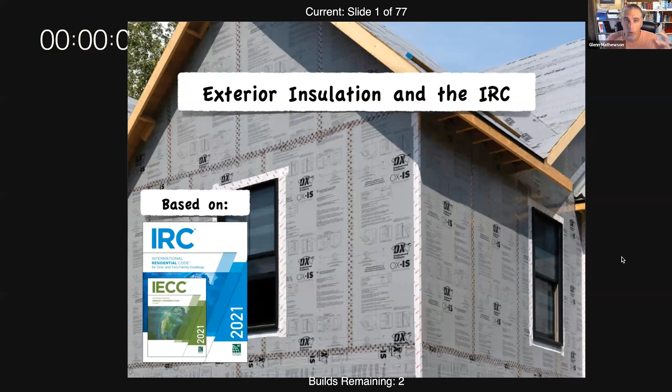So this is a brand new presentation I put together just for this event, Exterior Insulation and the IRC. This webinar is based on the 2021 International Residential Code, which includes the provisions from the 2021 International Energy Conservation Code. I'll give some details on that in a little bit.

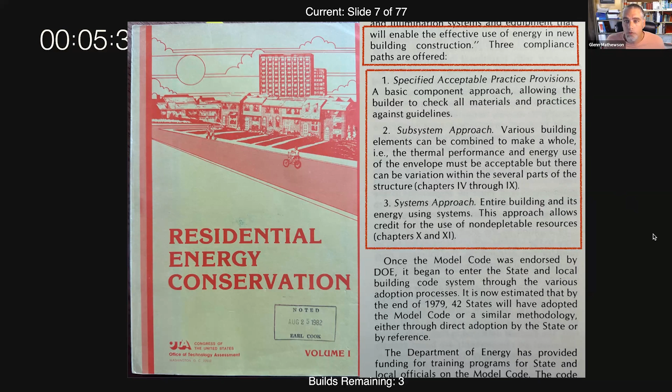And so we get these 3 methods of compliance. You've got the specified acceptable practice provision, and that's simply about energy loss, about R value, minimum R values of individual insulation components. R value is restricting the movement of energy through it, and that's what it was completely focused on: put enough restriction of energy loss in these individual insulation components.

And then the next one was the subsystem approach. What this allowed you to do was trade off some of these energy restrictors, R value. Maybe you use a little less insulation in the walls, but a little more in the ceiling. So it was a way to look at it not as individual components, but the entire building thermal envelope and do trade-offs between. But both of those systems were simply focused on not letting energy get out of the building, or in hot climates, get into the building, all focused on energy movement.

The third system expanded further and said, hey, what about energy creation? Because this was all about depletable resources. If we had a world of magical, abundant, free energy, by rubbing your hands together you could go 1,000 miles on your car, we probably wouldn't be having any of this discussion. We wouldn't have to conserve energy. So the third approach said, if we can encourage folks to create less energy in the house, then we don't have to worry about restricting the loss of so much energy, because we're creating the energy in a more efficient way.

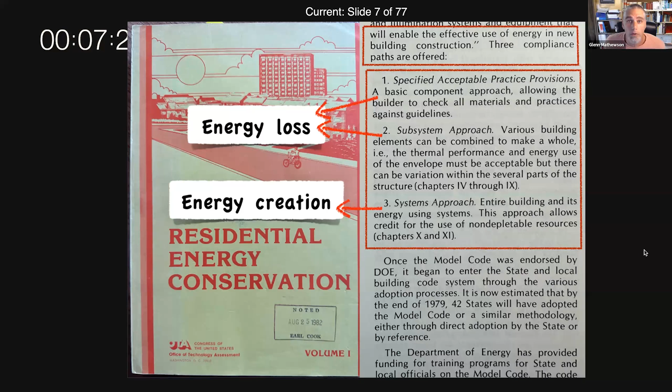So that extended to systems like mechanical systems, a higher efficiency furnace, higher efficiency appliances, better heating and insulating of your water pipes, all kinds of other methods to get to this overall concept of conserving energy.

Finally, the federal government, with funding and interest in this, was able to promote and fund the creation of the model energy code. This was our first real energy code, collectively lobbied to then be put out to governments to adopt.

We can see we have those same 3 concepts just under different titles. This one is about the minimum R value of your individual components. This is about the overall U value, as it was called then, of the entire building thermal envelope, which allows you to do trade-offs. And the third is the systems analysis, about cost of energy. That's kind of what it came down to - how are we going to compare this, how are we going to determine energy creation versus energy loss? We're going to have you compare to a standard house that's just using the R value or U value approach, just the insulation approach, for not losing energy.

That cost of energy method said: take the yearly costs of that baseline standard-built house, and now tweak it - put in a higher efficiency furnace, different appliances, better windows, change it all around. And as long as you don't spend more money than that baseline house, then you comply with code.

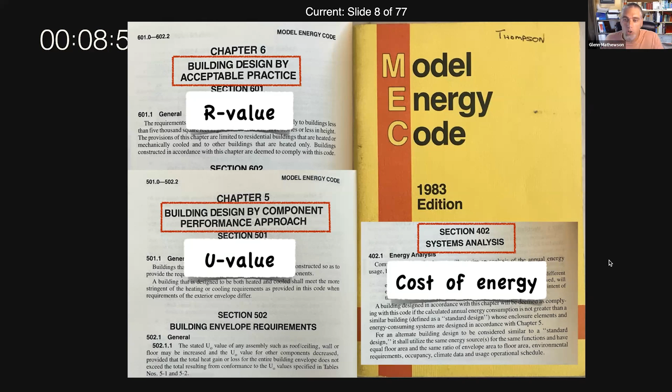So we started in the 70s, guys, with 3 different choices. Now today, in 2021, the code lays out 5 options here. Really it's 4 options and then a 5th one we'll talk about briefly - well, very briefly. The first option in the 2021 code is called the prescriptive compliance option.

This one is basically the option of the past. It simply gives you either the maximum or minimum U factor for the entire thermal envelope assembly. So whether you're 24-inch on center, 12-inch on center, or 16-inch on center, it doesn't matter - it's all calculated into the overall U factor of that assembly. I'll talk a little more about what U factor is in just a minute.

The other option you have is simply to look at individual component R values, like the R20 in your walls, R60 in your ceilings, et cetera. So within the prescriptive path, I've shown you 2 ways to calculate your energy compliance under that one option. And then you have a third way to do your energy compliance, again under that first prescriptive option.

Now what that's called in the code is total UA, but it's the same as what was developed basically in the 1970s. This is something you guys may be more familiar with - the term REScheck. REScheck is probably something you've all heard of. This is software by energy.gov, the Office of Energy Efficiency and Renewable Energy, basically the federal Department of Energy. They put together this software that's free to download, and it allows you to put in the areas of your different thermal envelopes. That's where you can do your trade-offs - a little more insulation here, a little less there, so that overall the thermal envelope complies.

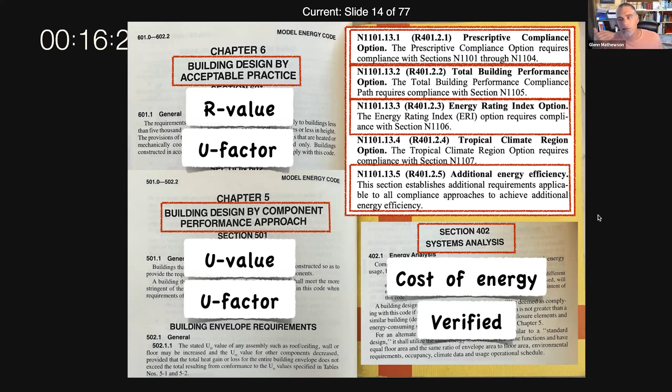FYI, that is something in your governments that maybe are not all on board with the enhancements in energy - that may be something you see amended out, because the way it's added in like that, it makes it convenient for folks if they wanted to go, no, we're not going to accept that as our government code.

So let's get into a little talk now about the prescriptive thermal envelope. Hold on, I've got to do a clock check real quick, make sure my time is right. Okay, so let's talk about the prescriptive thermal envelope. And as I alluded to already, I called it a recipe - I maybe should have brought this slide in sooner. This is one of my favorite slides, though, when I'm talking about the IRC.

Most of the IRC is just a cookbook full of recipes you can choose from. If you follow the recipe, you won't give your family food poisoning. If you follow the recipe for the structure of your home, it shouldn't collapse on your family. If you follow the recipe for energy compliance, you'll have sufficient energy, comfort, and energy use in your building. It simply says, do it like this and you're compliant.

It's a very easy way to make dinner for your family, right? Just look up the recipe. But not necessarily the most flexible way either, is it? You follow the recipe, but if you don't, hey, there's no promise that this is going to taste as good as we promised it was going to taste.

So if we look at that first recipe, the way the 2021 code made one subtle shift is it starts out by talking about the assembly, like a wall assembly, a ceiling assembly, a floor assembly, basement wall. You can see all the different columns, all the different titles for these columns, and what this gives is a U factor for that assembly. It incorporates everything: the air space within the wall, the air film on the actual face of the wall which provides a small amount of R value, the gypsum board likely on the inside, a little bit of R value, the sheathing - it allows someone to take every piece of their assembly and determine an overall U factor and then comply with that.

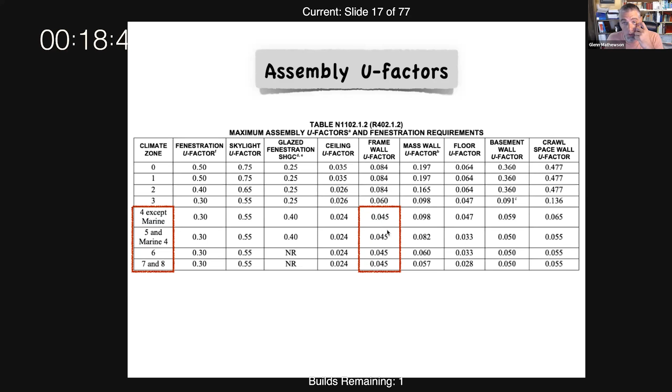So let's look at this example for these climate zones on the top here, or on the left - 4, 5, 6, 7, and 8 climate zones. And we can see that the maximum U factor here is 0.045. Now, U factor is a reciprocal of R value, so you can easily calculate between R value and U factor simply by the reciprocal, dividing by 1 or in this case dividing by the U factor. So 1 divided by 0.045 is equivalent to about an R22.

Now remember, that's not saying R22 cavity insulation. That's saying R22 of the entire assembly, so that's complete choice from the builder. If you're using insulated vinyl siding, if you're using a 5/8 Type X gypsum on the walls versus a 1/2-inch gypsum, it's going to change your overall U factor. And you as the designer can say, here is my exact wall assembly of all the pieces together, and I meet this maximum U factor.

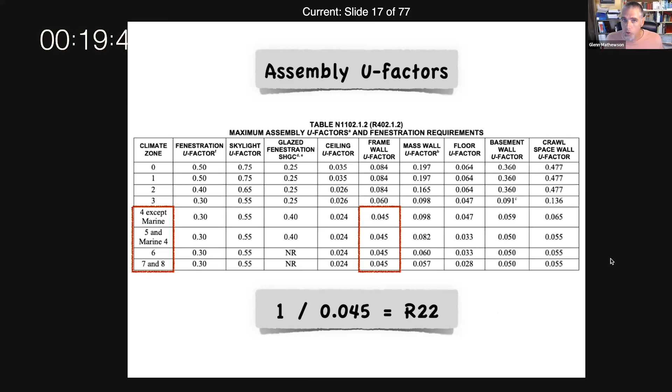There's a choice, but maybe that's too much work. You know, gosh, I don't know how to calculate that and figure out all these individual U factors. So next, the IRC says, fine, here's another recipe - a recipe for just insulation R values. We'll make it really easy for you.

You can see all the columns are essentially the same. Of course, this wood frame column now refers specifically to wood frame, whereas the previous one for U factor could be steel framing, wood framing, any kind - because you're going to calculate every single part, all the thermal bridges and their equivalents, to get your U factor. Here, it's dumbing it down to say, okay, this is for wood framed walls, and here's simply the insulation R values. This is another place there was a big increase from the 2018 to the 2021 code.

So if I again show you just those 4 climate zones, or climate zones 4 and up to 7 and 8, let's compare that to what I just showed you with U factor. You've got 4 different choices here. First, you could do cavity only insulation - and yes, I know that's R30. A lot of folks are probably going, did you say cavity insulation? I mean, there were times in the past that was our ceiling insulation level. And in some climate zones, like climate zone 0, it's still R30.

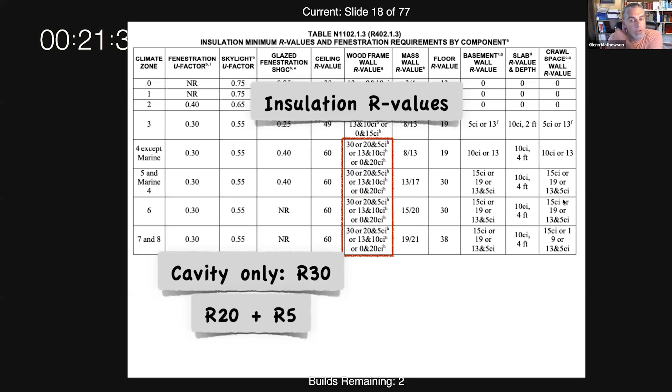And that's what the CI stands for when you look at this table, continuous insulation. Another option right here in this recipe, you could use R13 cavity with an R10 continuous. So what do we have here, my friends?

2x8 wall, or a double wall framing, or a 2x6 wall, or a 2x4 wall. So the energy code recipe and choices are designed around the different types of wood frame wall construction. So it correlates, it works, and it gives choice. How do you want to frame your wall? Pick that, and then this recipe will give you an option for that.

And then the final option here, and this is again kind of new coming into your 2021, is continuous only of R20. That ignores any size - build your wood frame wall however you want. We're not even going to worry about the cavity and what can fit inside of it. Just go full R20 on the outside.

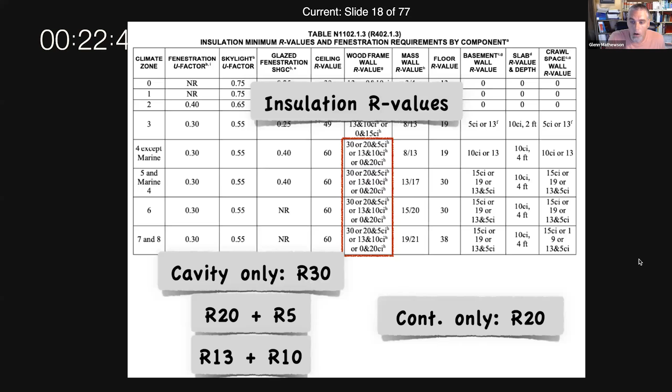And notice the correlation here, right? Continuous only R20. But as I already said, we're getting R values in the sheathing and the air film and the interior wall finish - we're getting tiny little pieces of R value. So this R20 is comparable to the R22 that we saw when you did that U value option, or the U factor option, where you're going to look at the entire assembly. So we can see the correlation between all these different choices.

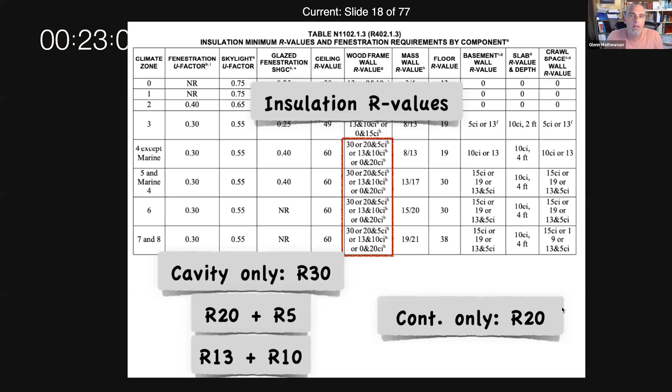Now, the shocking thing to a lot of folks, again, when we're coming into the 2021, that's going to kind of shake the industry up a little bit, is continuous exterior insulation, because that's not been common construction. I started framing back in the late 90s, and I've never framed a house myself with continuous insulation. It's definitely a different kind of construction practice, driven a lot by new materials and new technologies and new building science that we better understand.

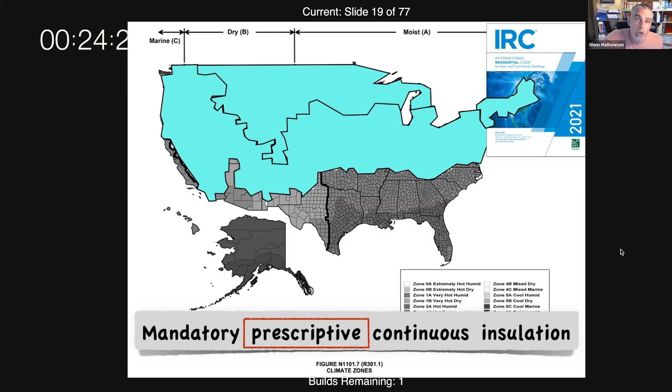Now, mandatory, but mandatory after you've chosen the prescriptive path. Because remember, the prescriptive path is just a cookbook - do these things and you're good. And so that's telling us, yes, once you've chosen that path for compliance, now you're looking at continuous insulation.

Of course, there is always the option for R30 cavity, but what does that also do? It completely changes your construction method, right? From 2x6 and 2x4 walls to now either doing 2x8 studs, or what may be more likely the choice would be like a double stud construction. So either one of these, R30 cavity or continuous insulation, is definitely going to be a big learning curve and a big shift for the industry.

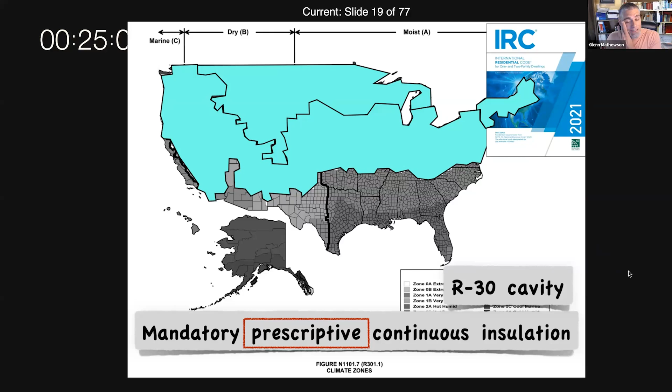And all I can say is this: we can see that this is certainly the direction that the codes are moving. But still, let me not say that this is so mandatory yet, because remember, part of the prescriptive choice is to use the total UA option, where you look at all the assemblies of the building. This is your REScheck option.

And so, like I was showing you before, kind of explained, but now I can show it to you. Here is your prescriptive R values. Just put all of these R values in all of these assemblies if you have them. But with REScheck, it allows you to say, you know, I don't want to do all that wall insulation. Let's decrease the wall insulation.

I'm not moving you down the column in the table, I'm showing a decrease in insulation in walls. But how are you going to offset that? By an increase of insulation, say, in your ceiling, or an increase of insulation in your floor R value. And the REScheck software calculates all this for you.

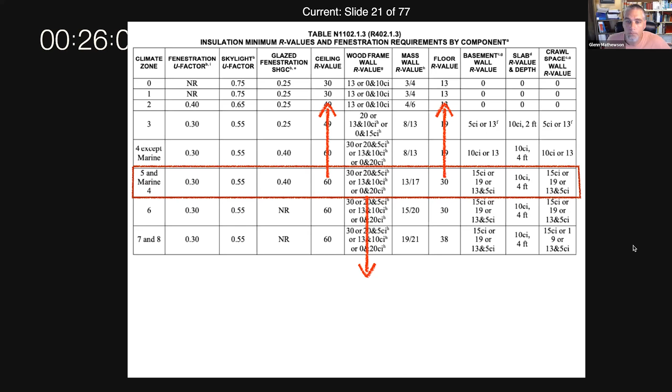So this is continuous insulation, right? This is the movement we're seeing towards continuous insulation. And as I said, this is a little bit new. This changes how you do your window pan flashing and flashing.

Do you set your windows back? Do you set them forward? How do you adjust your soffits and your overhang to get that standard size soffit? This is definitely not just something like putting in a better window. This certainly alters our normal construction practices a little bit.

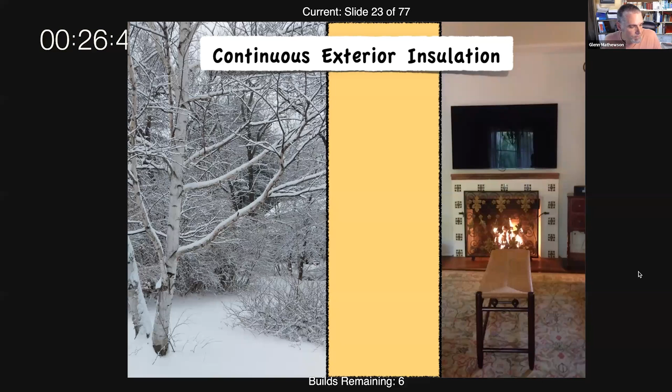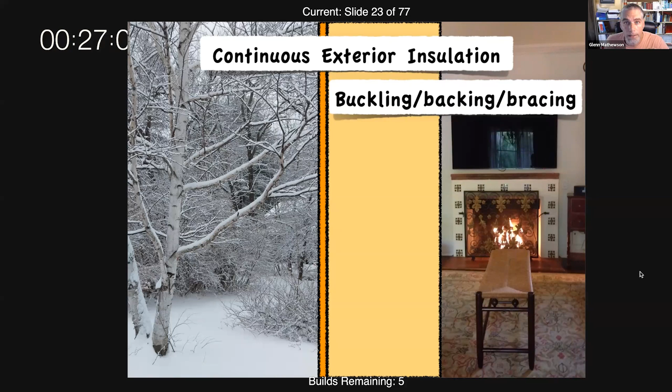So we need something to stop the studs from buckling, and something for backing and bracing. I'm going to talk about that in just a minute. We need a water-resistive barrier, and that generally needs to be on the outside. For buckling, backing, and bracing, there's some variation.

The water-resistive barrier needs to be on the outside to protect everything we don't want to get wet. We need an air barrier, part of the energy codes, right? An air barrier simply stops the movement from outside to inside, or inside to outside. That's it. So the air barrier could be on the outside, but you could also use one on the inside—perhaps your drywall could be your air barrier. It could go either place.

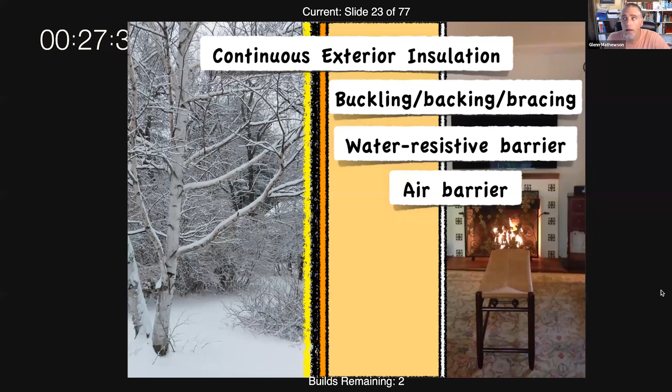And then, of course, your vapor control. Vapor retarders are kind of the historical way we've managed vapor. In the past, we've had warm-in-winter-side placement, so in warm climates, you would put the vapor retarder on the outside. The 2021 code has really developed in vapor control, and it's always going to be on the inside now, wherever you put your vapor retarder, if you do.

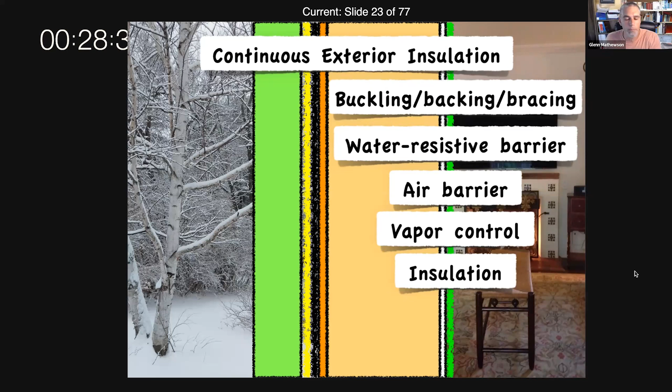But that's using a vapor retarder. My title here says vapor control, because that's the point—we're trying to control water vapor. We don't want condensation. So there are other ways to do vapor control now. With insulation, you can do continuous exterior insulation as a form of vapor control. Now we're full circle back to the original feature we're talking about: continuous exterior insulation for the sake of thermal protection, keeping the heat from moving out for our own comfort and energy savings. But we see at the bottom, it's also now a method for vapor control.

So wall sheathing—the first thing is buckling, right? If we have these studs loaded from the top and resisting on the foundation at the bottom, why don't we build decks out with 2x4 posts? Because the 2x4s will buckle. They don't have enough cross-sectional area. So the first thing wall sheathing can do is keep your studs from buckling.

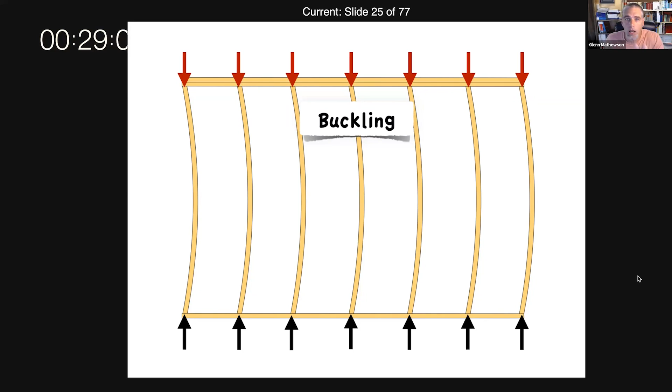But you don't have to use wall sheathing. The IRC actually has a way for you to do blocking if you want to keep the studs from buckling, but wall sheathing's the common choice. What's the next thing? Backing, right? Wall sheathing is there for backing for your different types of exterior coverings. So you may not need it on all of them.

What if you're doing an anchored brick veneer, a big thick brick? Well, it has its own strength from wind loads hitting it and pulling away from it, positive and negative wind loads. So backing's not an issue. But what if you choose a vinyl siding? It's a thinner material. Now you're going to need a type of sheathing to provide backing for those wind pressures, based on your choice of exterior covering.

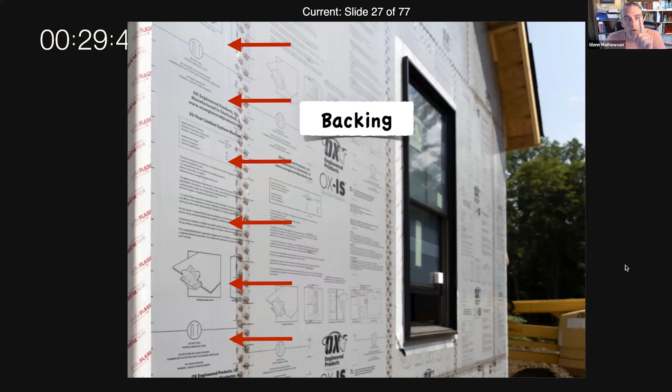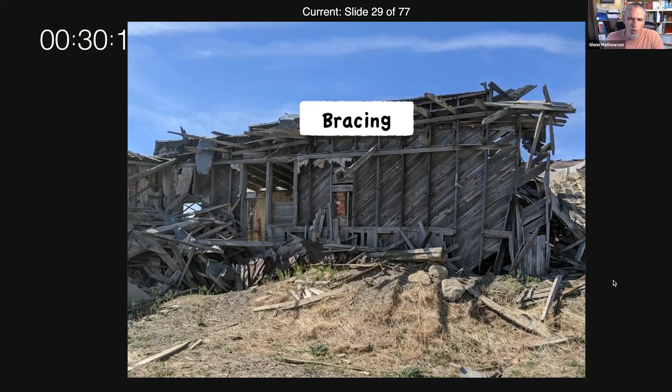And look at this—the house isn't even there anymore. But what stayed up? The braced wall stayed up. And why? Because it's diagonal boards, so we have a triangle, and the triangle creates that bracing. This is the old way of building. But then we started developing new products and new materials like black Celotex.

How many of you have seen that in your remodel work? I even worked with some of that in the late 90s—fiberboard sheathing, right? Once black Celotex came around, it was an easier, faster way to build. We could just plop up one big sheet, but we still had that let-in bracing to create that bracing for the wall, to create that triangle.

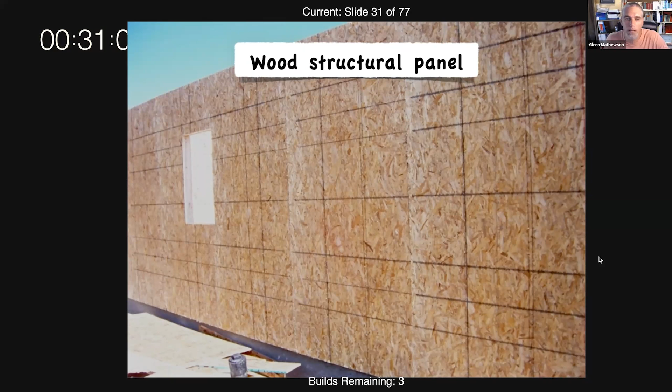And then, of course, what's everyone using today, right? Wood structural panels—that could be plywood or OSB. Last time I tried to turn one of those panels into a parallelogram, I didn't have a lot of luck misshaping it, because it does a really great job of bracing—it stays in the shape of its plane. Now, all these things I've mentioned are still in the recipe book. You can still do let-in bracing, you can do wood structural panels. There's all kinds of recipes in the code for braced walls, for buckling. I said you could use blocking.

Do you need backing for siding? Do you not need backing? That's all spelled out in your IRC cookbook. But aren't there other ways to cook a meal for your family?

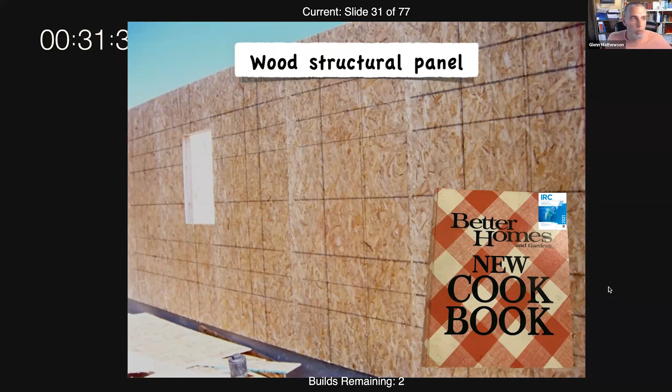We don't all cook from the same cookbook, and we're all still eating, aren't we? So the IRC gives us this section, one to never forget, R104.11, alternative materials. It starts out saying the provisions of this code are not intended to prevent you from doing other things. It's like the cookbook saying, hey, we've offered you some recipes here, but we're not saying you're gonna die if you don't follow our recipes. So what's another way you could make a meal for your family and know that they're going to be okay? They're not going to get food poisoning.

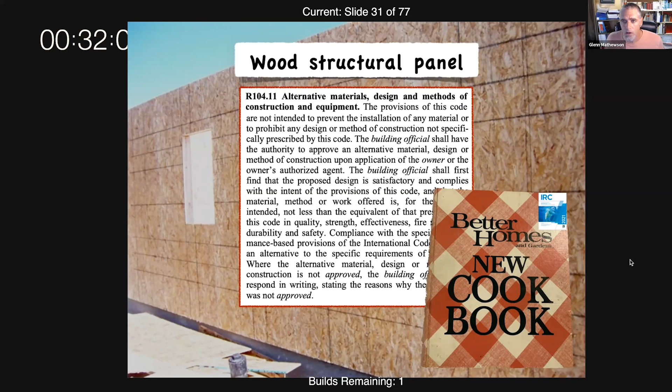Maybe from a chef, right? So what would be the analogy there? A design professional, like a cooking professional, educated and knowledgeable in coming up with unique and creative dishes. So you get an engineer, and an engineer could look to a document like special design provisions for wind and seismic. Notice it says design provisions. It's not speaking to you and I. It's not a recipe for prescriptive, hey man, just follow the rules. This is design provisions for the chef, for the engineer.

What's another way that we might get food that we can feel confident is somewhat safe for us? Like Twinkies. Okay, I know maybe they're not the safest for us. I need maybe a better example. Maybe one of these new plant-based meats or something. Well, maybe that's not necessarily from a chef, is it? Or an engineer. This is more like a tested product, like the FDA is going to come in and make sure your Beyond Meat or whatever is okay.

And so this is where we get another way of compliance, which would be a tested product, right? Like this, for example, Thermoply. I knew of Thermoply back in the 90s. It's been a product that's been around forever. It's not a wood structural panel. It's not a let-in bracing. It's not diagonal lumber sheathing. It's a proprietary product. So it gets tested, like your Twinkies if you will, to say, hey, is this going to give us the end performance we want?

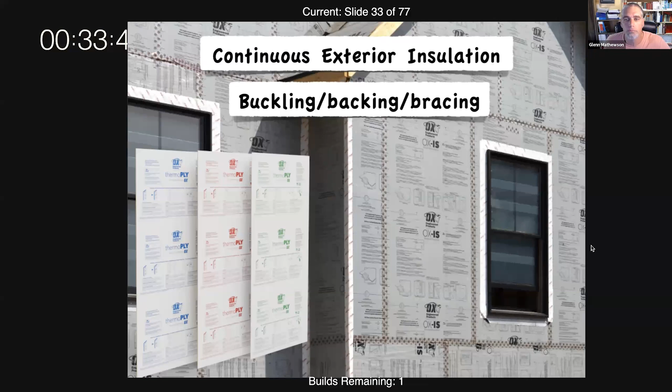And so that's where we're back to maybe we can get this to our continuous exterior insulation, since we're putting it on the outside, and it's this new kind of thing that we're not all familiar with in construction yet, and definitely the direction the industry is going. Maybe it can also provide for us some buckling, backing, and bracing provisions, and maybe it's not wood structural panels.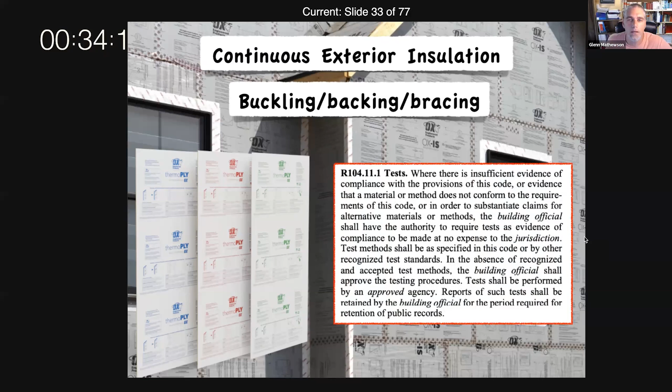How would you verify that? How would you verify your Twinkies? Right, it's going to have to be tested. You're going to have to prove with evidence that, hey, this will do the job. So that section for alternatives has a subsection about tests, simply saying, hey, tell us that this works. Give us the evidence that this is going to do the job of buckling, backing, and bracing.

Now, one thing I'll mention real quick that I threw in here is this is what's coming for you in the 2024 IRC. Remember, the IRC is just model codes. We can all be a part of contributing ideas to it. Somebody came forward and said, I want to add another recipe to the IRC. And this was approved for the 2024 IRC as an appendix chapter. I'm just briefly bringing it up to show you that these recipes aren't written in stone. We can all create new recipes to put in the code as options, or again, go with engineered designs or tested products.

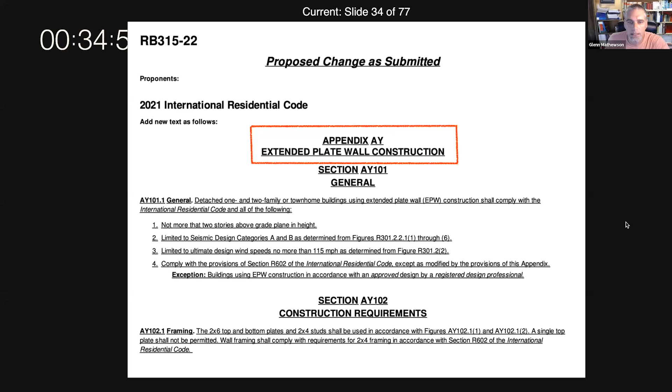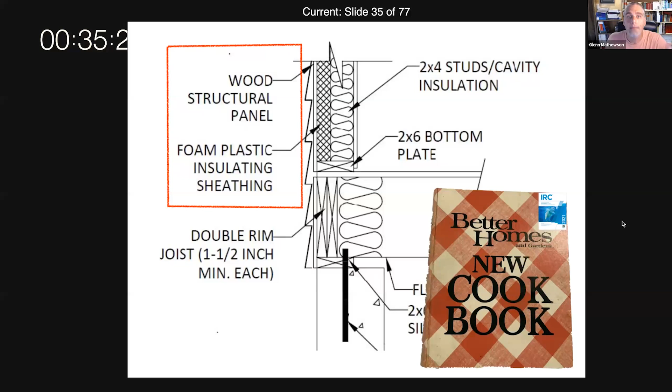This is extended plate wall construction. I added it in this portion of the presentation because what does it speak to? Your wood structural panel and your foam plastic insulating sheathing together, as one piece, looking at it as one design method. This allows you a recipe now to simply use these commodity products, if you will. So just another recipe coming for you in 2024. Maybe you have some recipes to propose for 2027. That's how these get created. People have to come up with them and propose them.

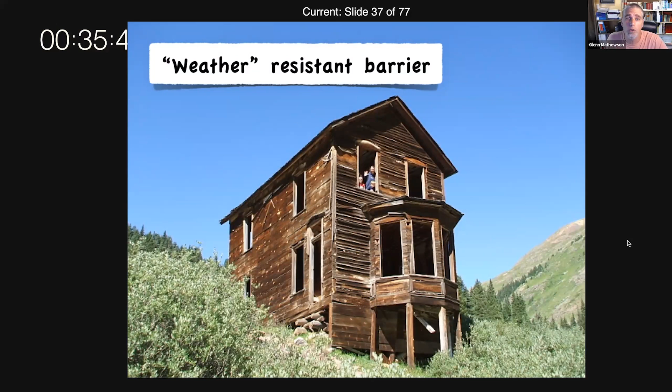All right, what else might be happening on these walls? The water-resistive barrier, right? I showed you that thing, and I took you through all the different things happening on our exterior wall. So water-resistive barriers used to be called weather-resistant barriers way back in the day. And actually, even in our recent history, it was still called a weather-resistant barrier. Let me take you back to one of my dork books here, my history books. This is from 1950, from the federal government, Forest Products Laboratory, Department of Agriculture. And look at this, condensation control in dwelling construction.

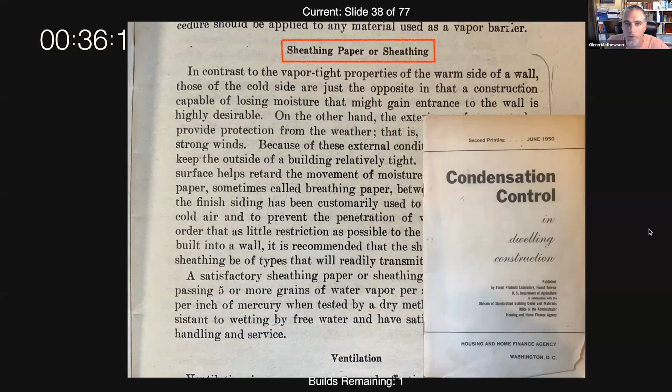In 1950, the federal government was trying to help research and provide guidance on how to do that. Here's a section from this book about sheathing paper. Notice what it says here. I love this: sheathing paper, sometimes called breathing paper, between the sheathing and the finished siding has been customarily used to reduce infiltration of cold air and to prevent the penetration of wind-driven rain. Weather barrier, right? Cold wind, cold rain. Weather, we associate wind and rain, precipitation, weather.

So it's a weather-resistive barrier, speaking specifically to sheathing paper, a product, not necessarily a performance. Now move forward in time to the 2000 IRC, and we still see the reference of sheathing paper, right? That doesn't sound like a lot of choice or options to me. That sounds like paper. Can you all imagine what paper looks like in your head? Yes. Well, the code's telling you paper. But notice what we're even seeing here: it wasn't even required.

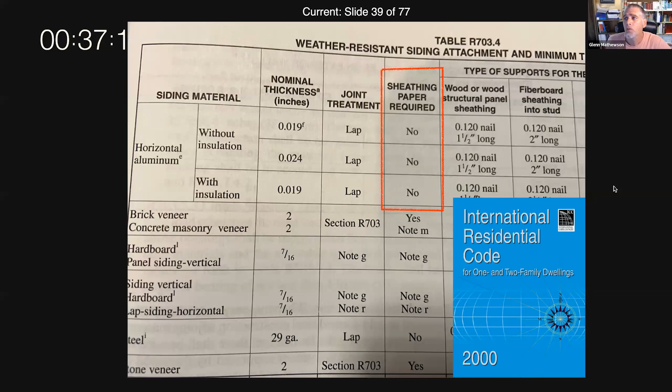In 2000, you could build, depending on your siding material, without even having any weather-resistant sheathing paper at all. Now move forward one code cycle to 2003, we still see the term weather-resistant sheathing paper, but now we're actually getting a statement telling us about where it needs to be installed. In 2003, it was everywhere, except for those exceptions. But if you look at what it is, it's still referring to felt, to paper. Look at the title, sheathing paper. Paper, that's something in your mind's eye, and the code says that's what it has to be.

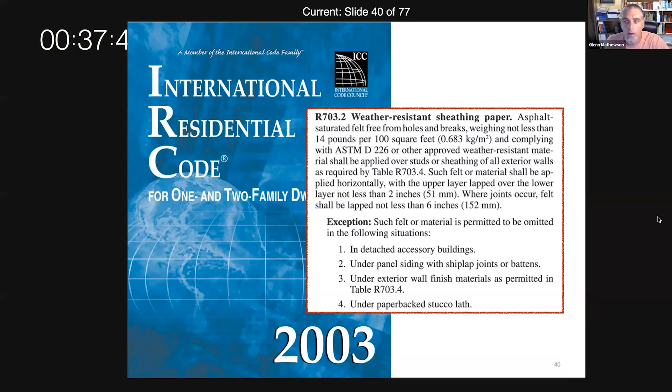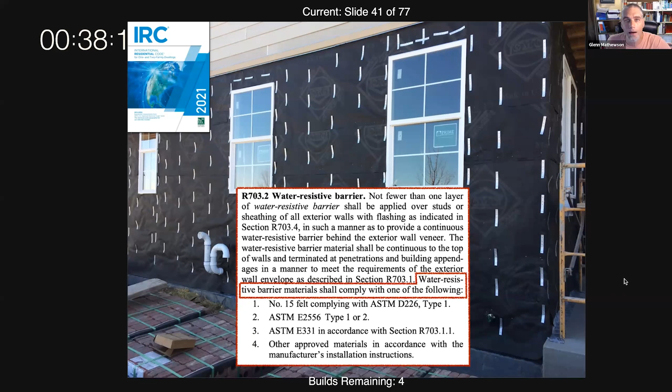So what's the first choice, right? Good old tar paper, sheathing paper, just like what's in the picture, the basic simple commodity that's been around since the 50s. What's the second choice? It references us to an ASTM standard. That ASTM standard is essentially your sheet products, your house wrap or home wraps, and those are all trademarked terms, but you know what I'm saying, right? Your big sheet products that aren't an asphalt paper, but still somewhat similar, but proprietary. They can be made out of all kinds of things. People can be creative. You test it to a standard, and that's what makes sure all these creative ideas still are going to meet the same performance.

Test standards promote freedom of innovation, and that's an odd thing to say - test standards promote freedom of innovation. Most people think test standards restrict freedoms, but you got to shift your perspective.

What's the third choice? The third choice is referencing an ASTM test for essentially testing windows, curtain walls, doors. So in case you came up with a water resistive barrier that you wanted to test it in the way that windows are tested - I'm not super familiar with that one, but guess what, it's another option. And then what's the fourth option? The fourth option is, hey, that's a pretty cool new idea. That's the way I word it. But what does it say? Other approved materials, other approved materials. That's the code saying, hey, that's a new idea, right?

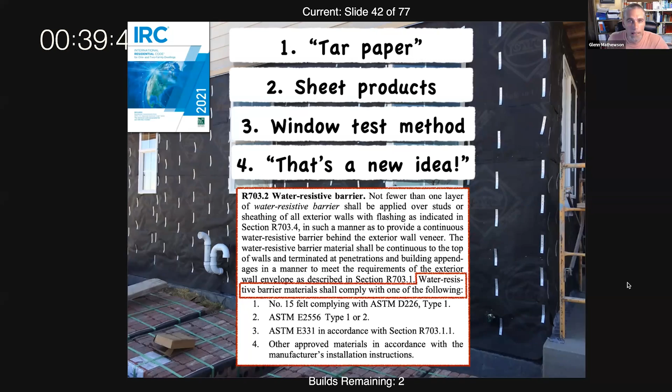So what about the tape systems? There's manufacturers out there with wood structural panel systems that you can tape, and your water resistant barrier is built into it. This is an image from the sponsor of this today, and they have a product where the water resistant barrier is built into it. Hey, that's a new idea.

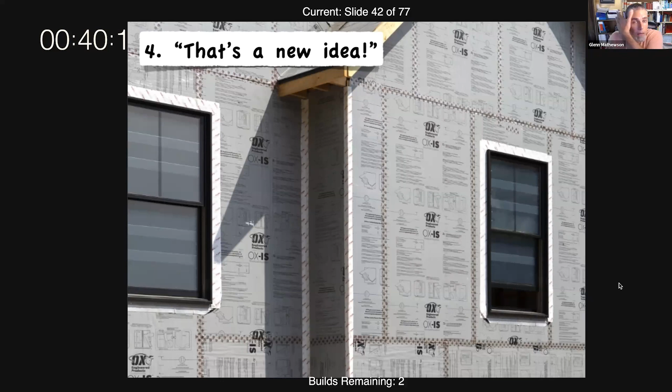How do we verify another new idea to perform the water resistant barrier function? Well, I already showed it to you, R104.11, saying, hey, you've got to simply validate that this works, and then the subsection for testing. Here's what this is saying in the code, guys.

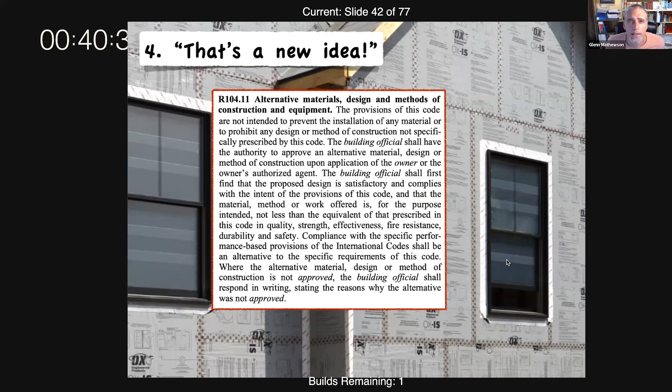Anytime the code says 'or other approved methods,' here's what I want you to look at it like: it's a now hiring sign. It's saying, hey, the code is simply saying out to the free public, out to everyone, say, hey, we're hiring for a position of water resistive barrier. We have this job that needs to be done, and we do not discriminate against all the different various applicants to do this job of water resistant barrier, and we're hiring more to do this job. You need to provide me with your resume and your work experience, right? Evidence that you can do the job that they're hiring for.

And the code is looking for evidence. This is where we would get compliance reports like ICC ES reports, or there are other third-party providers out there that do code evaluation reports and basically provide documentation to say, hey, look, I can do the job.

Okay, cool. So maybe now water resistant barrier, maybe we can integrate all of these different features. Maybe you can find one employee that can do multiple jobs for you. That might be easier for you as an employer. That's a choice that the IRC is making so readily available to you.

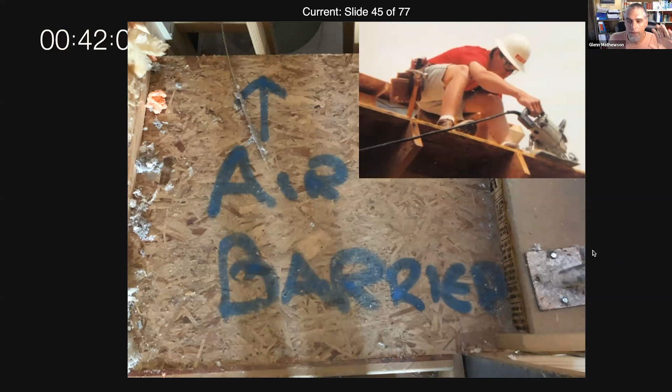Next one, let's do air barriers, right? Now, I was a framer back in the 90s and early 2000s. I got into decks more in the 2000s, but this is me back in the late 90s in my 20s framing a house. And if I'd have seen air barrier written on the floor back then, I would have had no idea what anyone was talking about.

We didn't talk about air barriers, not in Colorado in the 90s when I was framing. But nowadays you see air barrier. This is a superintendent on a job site writing for the trades professionals, hey, you missed an air barrier here. Now, one of the reasons we never heard so much about air barriers, it wasn't so much of a mainstream topic, isn't because it wasn't in the code.

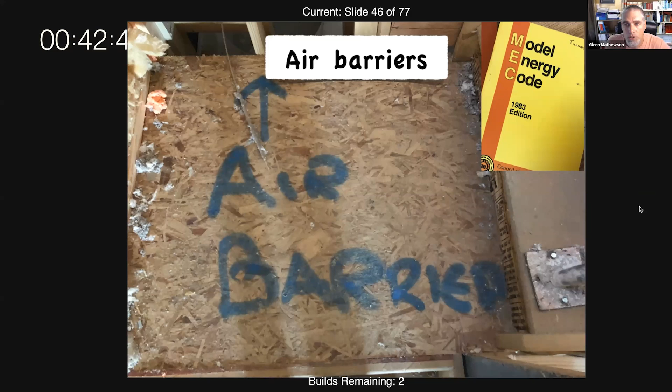The Model Energy Code 1983 talked about air barriers, had provisions for air barriers. But the thing was, it was a completely separate book, so it wasn't as easily available to all of us to access that information. It wasn't until the 2000 IRC that Chapter 11 of the residential code included the energy provisions directly in it. So they were basically in our face. And so you start to see more of a movement towards energy code compliance and energy code building, really starting around 2000 when it finally got mainstream enough to actually just put it in the one single book.

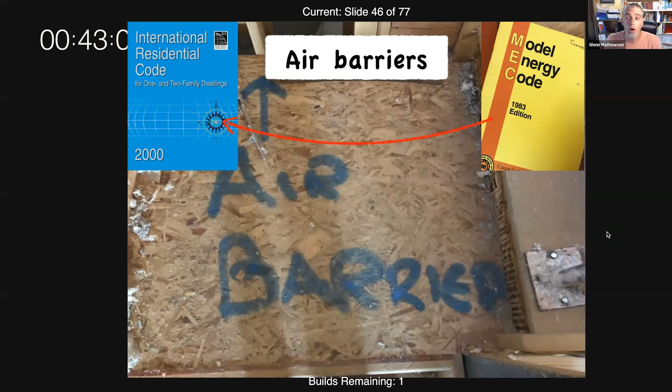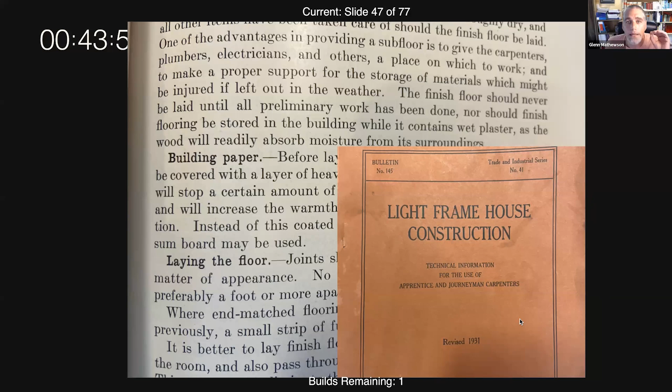And there's a reason I'm making that point. But look at this, I'm going to take you back in time again to 1931. Another document from the federal government, light frame house construction. My friends, 1931, we are almost 100 years ago. And what does it say here about building paper? I should circle the second sentence there: will increase the warmth of the floor by preventing air infiltration.

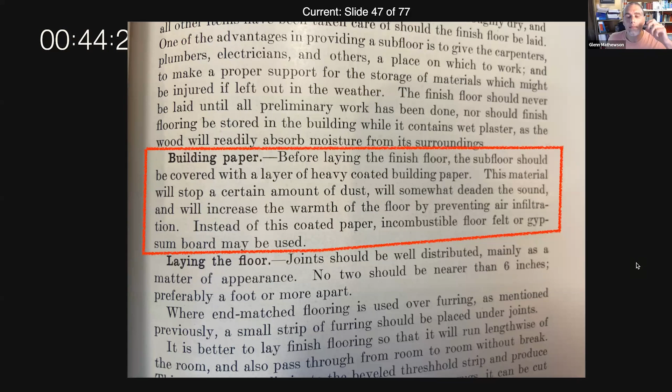This is not a new subject. 1931, the government's trying to encourage us to be smart when we build because we don't want cold, drafty air coming into our house. So air barriers have been around a long time, weather-resistant barriers for rain and air. And that was our sheathing paper, was functioning as that. But of course, now here we are today.

We have the IECC in Chapter 11 of the IRC, and we have a definition for air barrier. And it's silly, right? Materials put together to restrict the passage of air, what? Through the building thermal envelope. And then we have a definition for continuous air barrier, which is kind of redundant. Not sure why we have that, but it just says it's air barriers that are a combination of materials, but it's all about preventing the air movement through the assembly.

And then how do we know that we've done that? How do we know that we have blocked the air sufficiently from moving inside or outside, outside or inside? Well, this is something that's been slowly coming into the code, our blower door tests. It was optional before, and now under the 2021, it's mandatory. I believe that was actually the 2018 shift that made it mandatory. But yes, no matter what your compliance method at this point, you will need to test the air leakage.

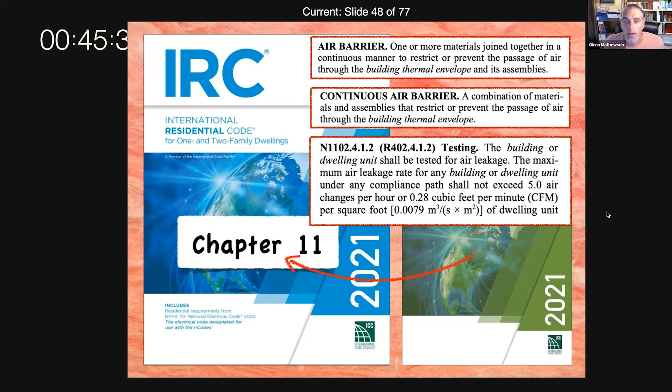But notice what it is, it's just a way to literally test the end result of the construction to say how much air actually gets through the building thermal envelope. It's a test that's done at the end after you've done everything, right? A blower door test, many of you may be familiar with that, depressurizes the house, and it has measuring units on there to determine how much air movement has run through here under a certain amount of depressurization.

But how do you know what materials, how to build your assembly? What do you have to use? What's required? Well, the code doesn't give you a lot of that. It gives you a final test at the end to say, are you tight enough construction or not? Now that's under the IRC.

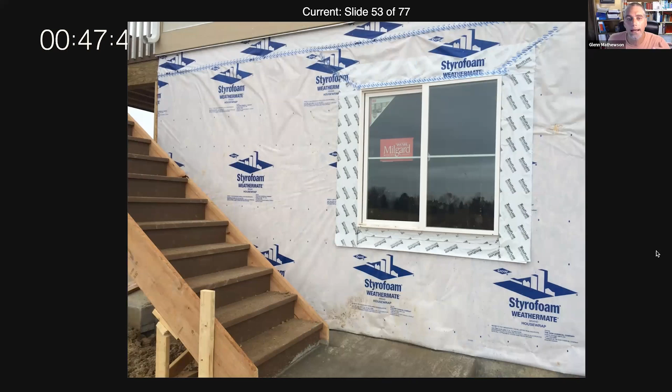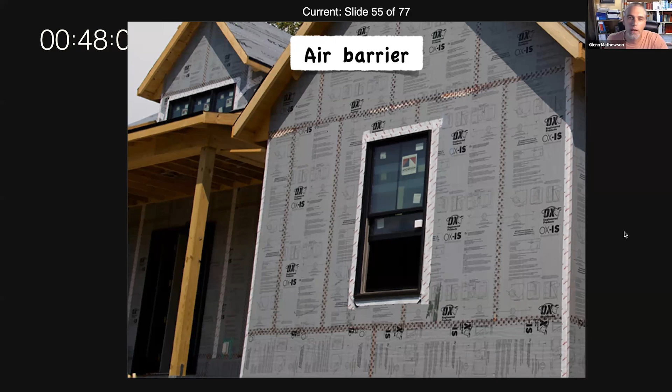But maybe that's not your style. Choices, my friend. Maybe you want to use an air barrier where your wall sheathing is actually your air barrier. There's products like that on the market, like our sponsors of this presentation. There's other folks that make just an OSB. But when you see these taped sheathings, this is where they're saying, hey, we're going to double up and let our sheathing function as our air barrier.

That's a choice you get to make. Maybe you don't want to do that. Maybe you want your air barrier to be on the inside of your wall sheathing. No problem, right? The IRC is just saying pass the blower door test at the end. Keep your air changes per hour within the limits of these codes, and that'll depend on your climate zone.

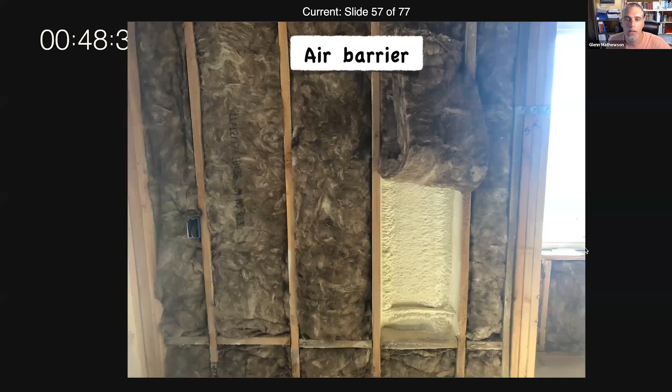So there might be an example like this, where a builder is doing a spray foam against the inside to create their air barrier, and then completing their thermal insulation with a different type of insulation product. This is a choice. Or maybe you want to put your air barrier on the inside and make it your drywall skin. Because remember, it's all about testing air movement from the inside to the outside or vice versa. So you have some choice here.

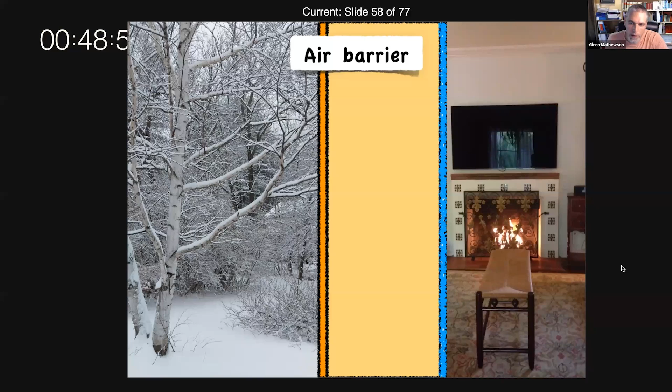In those cases, you don't have to seal your box. It's not part of your air barrier. What else does it say?

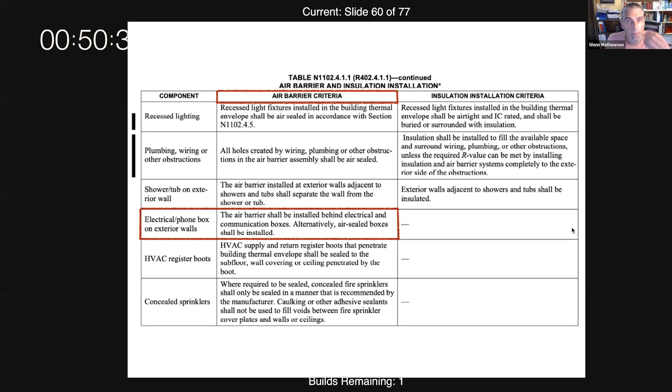Alternatively, air sealed boxes shall be installed. So this language is kind of speaking to you to say, look, depending on where you choose to put this air barrier will result in different requirements in the code that help you ultimately get to having that blower door test pass. Now, what's new for 2021 is this section, electrical and communication outlet boxes.

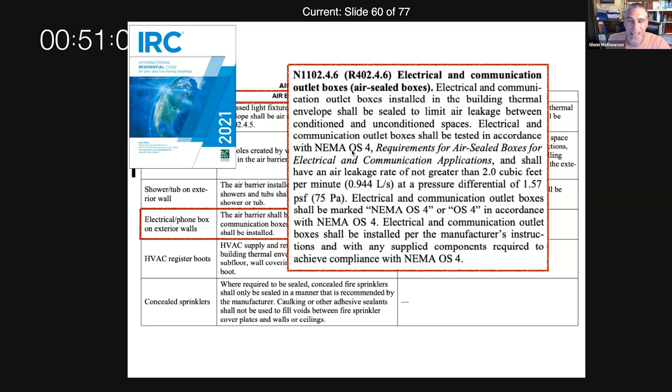This entire section's brand new for 2021. And now what that's going to require, notice that language, air sealed boxes. No more sealing it with spray foam that blows into the electrical box, takes up some of your space for conductor fill. Now it's telling us, for 2021, if you want to use the air barrier on the inside, you'll have to buy these specially tested air sealed boxes, tested in accordance with NEMA OS 4.

And that may be something that designers want to consider as they make all these choices. Every choice you make has an effect, a domino effect on something else. So back to our continuous exterior insulation, maybe it can double up for buckling, backing, bracing. Maybe it could also function as the water-resistive barrier. Maybe you can also integrate your air barrier into this.

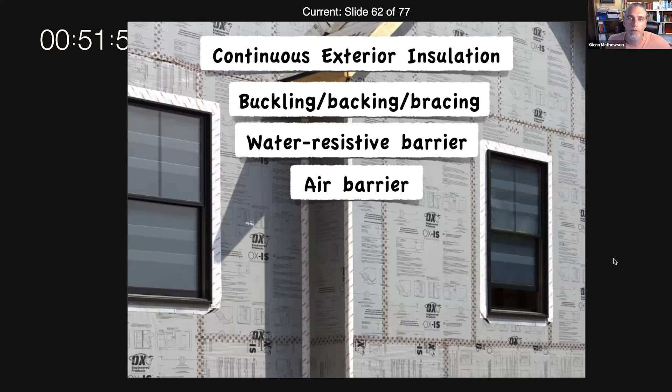If you did, well, now you get out of buying those tested boxes. If you don't want to, well, you can see the result if there's going to be some other things you need to do. So all about choices.

And then let's talk about the last thing, vapor management here. And then I'll wrap this up and we can get to the Q&A. I know I'm a little bit over my time, but I'm almost done here, guys.

So vapor management. Now in the past, right, visqueen, plastic, polyethylene sheeting. Boy, did we do some bad stuff in the 2000s, turn of the century. Even the building code was not giving good advice. I mean, the building codes do the best they can to learn with the people as we are learning.

Well, the idea of just throwing this up all over the walls created a bit of problem in that if we put that class 1 vapor retarder on one side of the wall without thinking about what is the vapor permeability of the material on the other side of the wall, we may find that we have vapor barriers, class 1 retarders on both sides. And now we have what's called a vapor sandwich. And one way or another, moisture finds its way into the walls.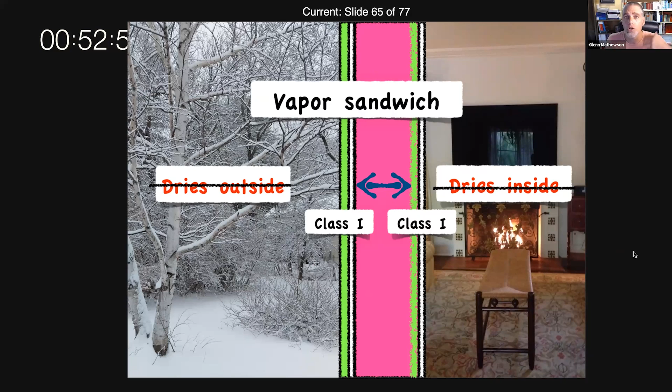Either it's already there from construction or a little bit of air leakage brings some in. And a vapor sandwich, we have come to realize, is a really bad idea. We have to just accept that walls may get a little moist inside. The way the climate works and our need to control temperature in air, we have finally, the 2021 really pretty much says the message of, we know the walls might get wet.

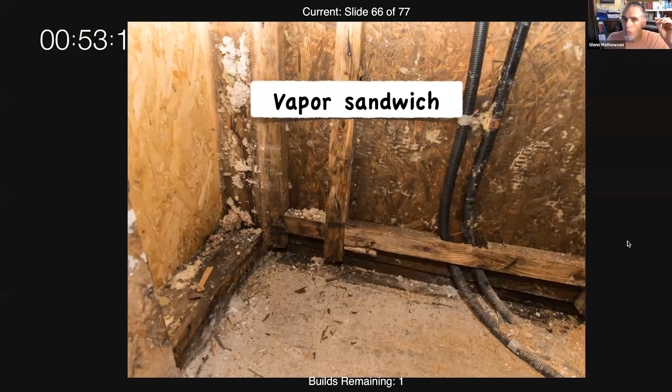We don't want vapor sandwiches. We've got to let the walls dry one way or another. So in chapter 7 of the IRC, we're outside of the energy chapter, but boy, we're still really tied in with everything energy related, all the concepts of energy science.

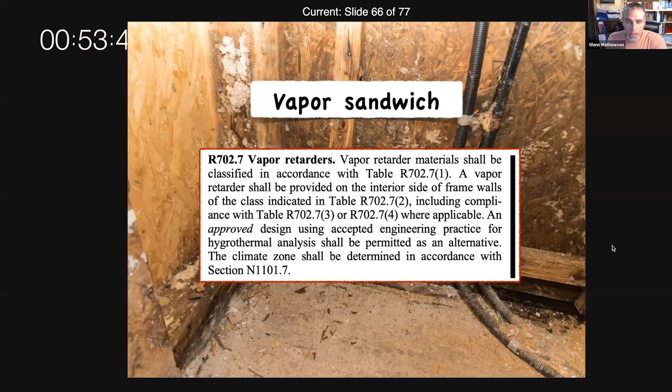And so you can see this black bar. This is a brand new section, vapor retarders. I've got a 4-hour presentation just on vapor control. So this is now a very big subject, but I'm going to just bring it back to continuous insulation before I wrap this up. So we have this section talking about vapor retarders, and it's pointing us to a lot of different tables. And these are some new tables in the IRC.

Here we get the different vapor retarder classes and the different types of material for each class. And each class has a different permeance. This is about how much water vapor can move through these products. Your plastic polyethylene is a class 1. Not much water vapor moves through. So it inhibits drying. And that's what creates those vapor sandwiches, if you will, where you're getting moisture damage inside.

Because you're not drying. And then we get this other new table about your different vapor retarder. Wait, what does that word say? Options. Options, my friends. When you read the code and learn the code for yourself, you learn all the choices and options you have in it.

When you wait for failed inspections or other people to tell you what they heard or what the inspector said, you're not getting the full choice that the code gives you. So options are all throughout this book.

Now, let's go back to those cold climates, where we're going to wear jackets, where we want continuous exterior insulation. And we can see that we get 3 different kinds of choices. We can use a class 1, a class 2, or a class 3 vapor retarder.

Now, a class 3 is like paint. If you look up there under the class, it's latex enamel paint. It's relatively vapor open, but it still retards a certain amount. It's under 10 perms. So before I take you to the table that allows us to use a very vapor open interior vapor retarder in a cold climate, let me first show you what the table is about.

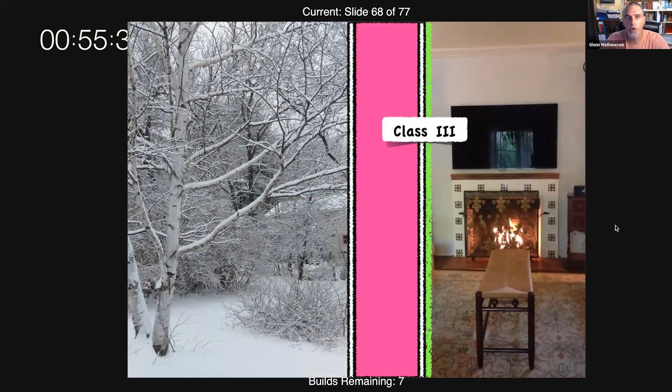So here's our wall. It's a cold climate. We're warm inside. We want to put a class 3 vapor retarder. No plastic, we don't want to risk the vapor sandwich. So we're just going to use a paint on the inside, a class 3 vapor retarder. That's going to do a really good thing for us. It's going to let that wall have the ability to dry to the inside.

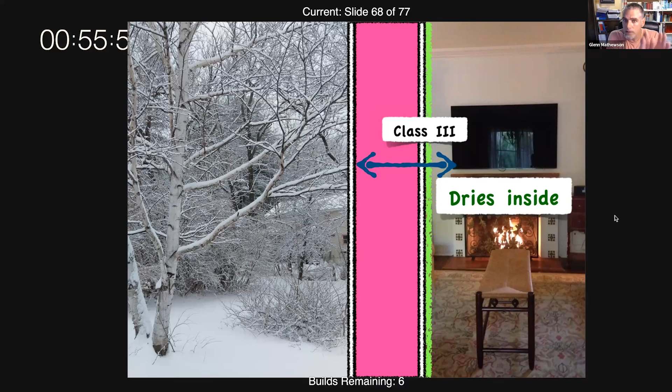At least, not sure what's on the outside here. Who knows? The code isn't getting into that question. It's simply letting us go, all right, we can now dry to the inside with this class 3, and we have less risk of that vapor sandwich and real mold, mildew, and decay starting inside the walls.

But what does this also mean? Well, it also means more water vapor can move into the wall. We can move water vapor out to dry, but we also can move a lot more into the wall. And so that means we're going to have a higher relative humidity inside the wall with a class 3 versus a class 1. Well, it's cold outside, and we have this one sheet of maybe 7/16 or 9/32 or

9/16 wood structural panel sheathing. Maybe we got some OSB here, typical build. Well, the very back side of that wood structural panel is a very low surface. It's really cold because there's nothing warming it. You have the heat coming from the inside, but that heat is lost very quickly through the sheathing.

So this is the recipe right there. A high relative humidity with a low surface temperature. We don't want two reds. That is a recipe for liquid water to create. Now, if it does create liquid water from condensation, we do have the ability to dry, but we still want to try to reduce the creation of that condensation.

So what we can do now, what this table allows, is if you use that class 3 interior vapor retarder, you can use continuous exterior insulation. What's that going to do? It's now we got heat. Heat's moving through the house. We're losing heat, bad, bad.

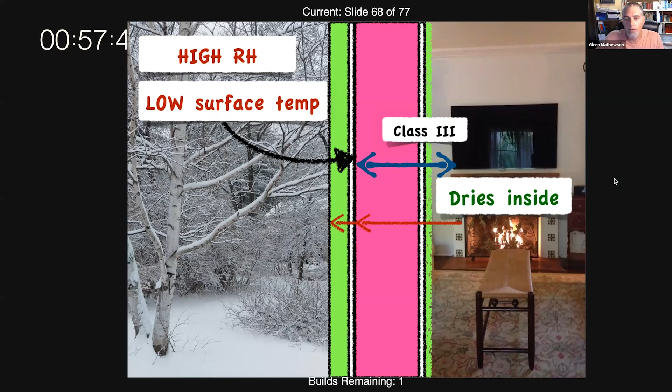But that's the heat that keeps the inside of that sheathing warm. By putting insulation on the outside, we slow the heat moving away from that surface. So we have heat coming to the surface. That's good to keep it from condensing. And now we're going to retard how quickly that heat moves away from the surface. And what has that done? It's raised that surface temperature. Now we're better off. We have a high relative humidity, but we also have a higher surface temperature.

Oh, but what happens if we go with a bigger wall cavity? We want to increase our cavity insulation. Well, we have to think about that. We have now the same amount of resistance to the heat leaving the wall, but we've added a whole lot of resistance to the heat coming to the wall. So we have now just affected that temperature on the inside, and whoop, now we might be back to a low surface temperature again.

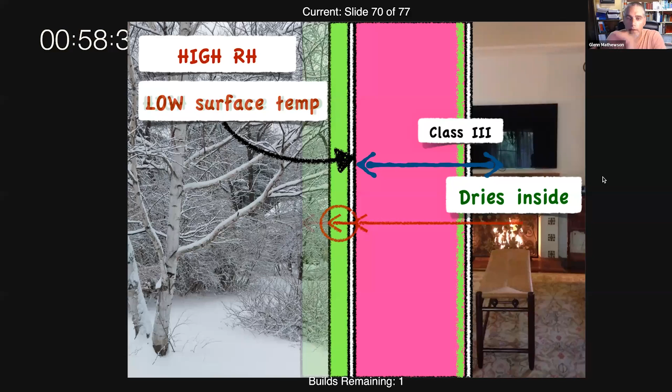And so what that table I'm going to show you will say is, if you increase that cavity insulation, slowing the heat coming to the back of the sheathing, now you got to increase your exterior insulation too. So we can also slow the heat leaving that surface, and we can get back to having high surface temperatures. I call this the battle of the dew point. We're trying to control that temperature between these two insulations.

And so you can see here in the table that points to, you get the option. Here's climate zone 5. And we have a high relative humidity and a low surface temperature because we have a class 3 vapor retarder. So what are we going to do to fix that?

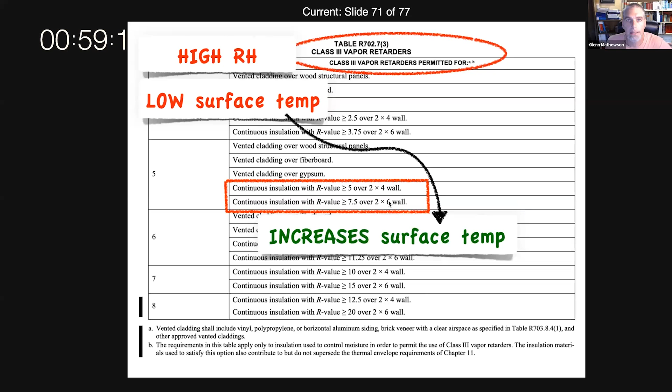Continuous insulation increases surface temperature by insulating our sheathing. Up until this time, we've always looked at insulation as keeping us, the humans, warm, or keeping our energy bills low. This is where we're seeing insulation to literally keep the wall sheathing warm. It's not about us anymore.

You can see it's an R5 over a 2x4 wall, or an R7.5 over a 2x6 wall, that battle of the dew point. You can see here in your colder climate zones, the colder it gets, the more it's pulling the heat away from that interior of our sheathing. And so we get an R10 continuous, an R15 continuous, right?

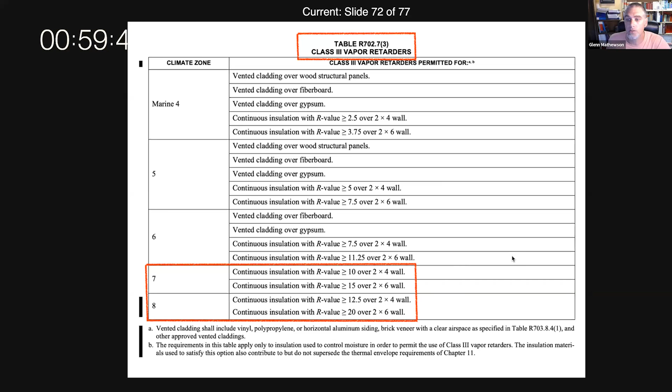Whereas we may have this for climate zone 5, and there's that certain amount of resistance to the heat being pulled away from the surface we're keeping warm, you go to climate zone 7, it's a lot colder. It's pulling that heat away a whole lot faster. So we have to increase that exterior continuous insulation.

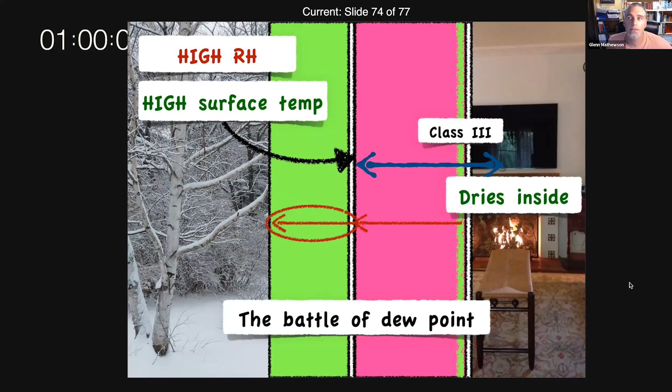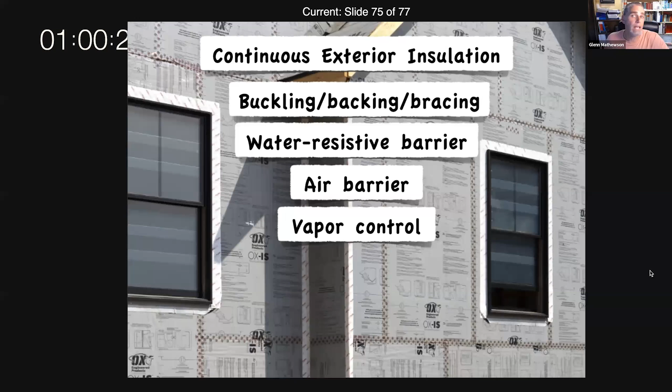Now we see how vapor control brings us full circle back to, hey, continuous insulation could also be a form of vapor control. And how much of this, based on choices you make, can you put into killing two birds with one stone, as they say? But these are all choices. Make your own choices. That's what really understanding the code empowers you guys to do.

Thank you so much for letting me go through this brand new presentation, a little bit over time, and I imagine maybe there would be some questions. So let's certainly get to that, and thank you all for letting me share this.